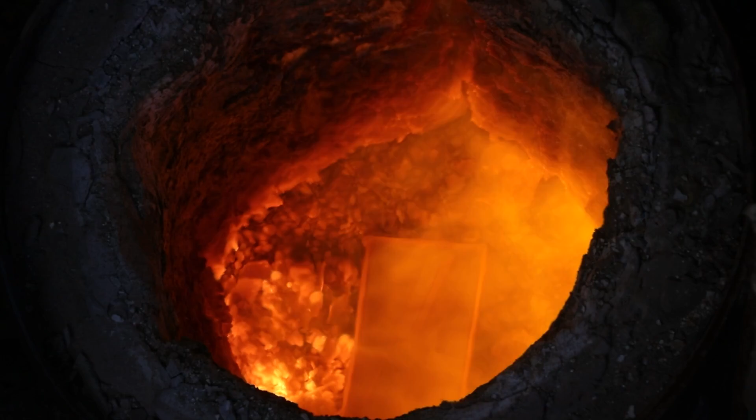For a topic that pretty much boils down to heat metal up to red and then cool it down quickly, it can be a lot more complex once you dive into the theory behind it, and I think there is a fair amount of misunderstanding on the topic. And you know, I can understand that.

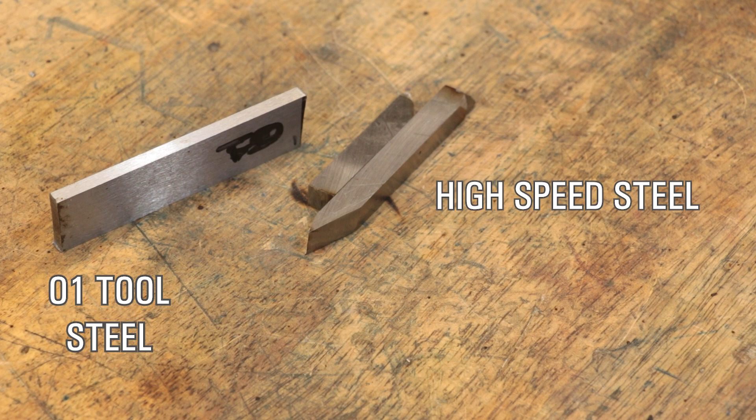For instance, let's take these two pieces of steel. They're both tool steel and they look almost identical, but if you were to heat them up and quench them in oil, one of them would be relatively unchanged, whilst the other one would be in the 60s Rockwell C hardness, which is very hard for a metal.

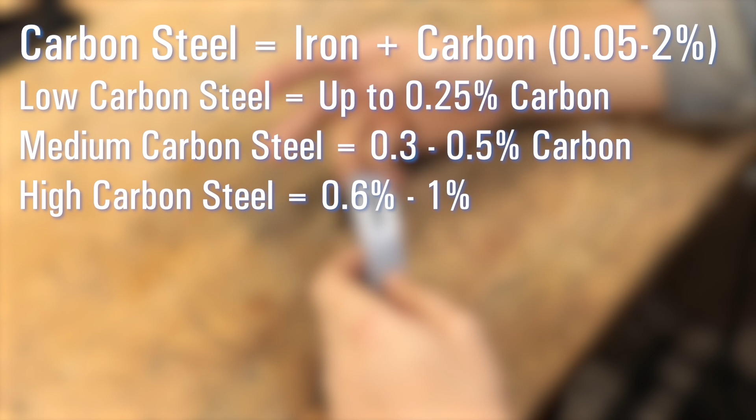But before we talk about alloy and tool steel, I want to go over plain carbon steel first. It's the most basic type of steel to heat treat, and it's probably the most straightforward to understand. And by carbon steel, we're talking about steel where the composition is iron and carbon for the most part. And as a percentage, carbon is going to make up about 0.05 to 2% of the metal.

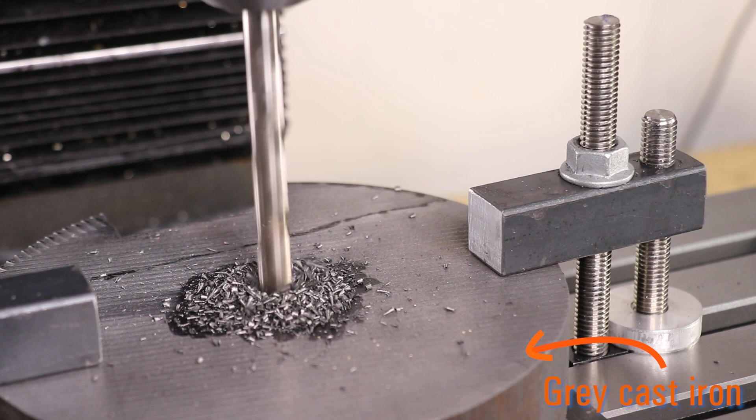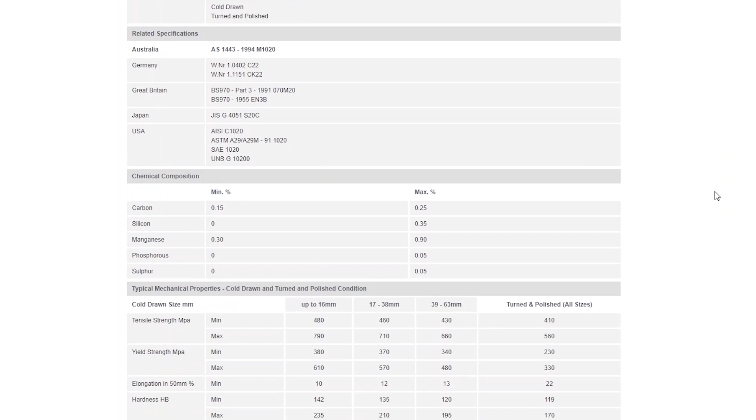Once you go above that, you start to get cast iron, and that is a very different metal in terms of its physical properties and heat treating. Now generally you will get some phosphorus or silicon or sulfur mixed in, but we won't worry about that a whole lot here. What we're really focusing on is the carbon,

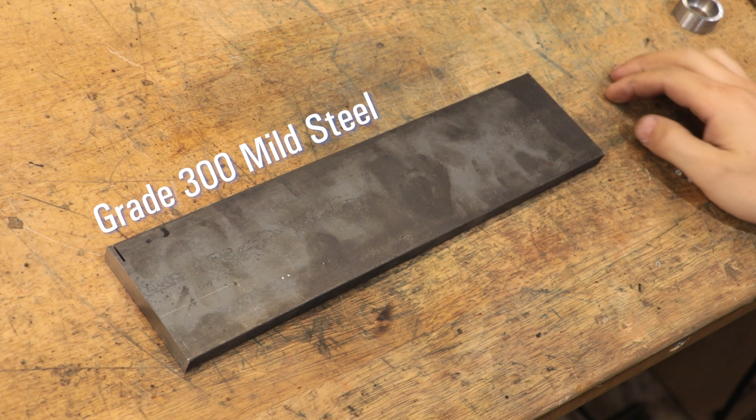because when it comes to steel, and this includes alloy steel, the amount of carbon really does make the difference when it comes to determining the physical properties. That being how much carbon there actually is and how it's arranged in the internal microstructure of the steel. Case in point, this is mild or low carbon steel, and you see me use this stuff all the time. This stuff has about 0.2% carbon,

and it's a really good steel to work with, and it's a relatively strong metal. But if we took this same piece of steel and raised the carbon content so it was closer to about 1%, it might be twice as strong, and that's nothing to do with heat treating, that is just the effect of what a small amount of carbon can do to steel.

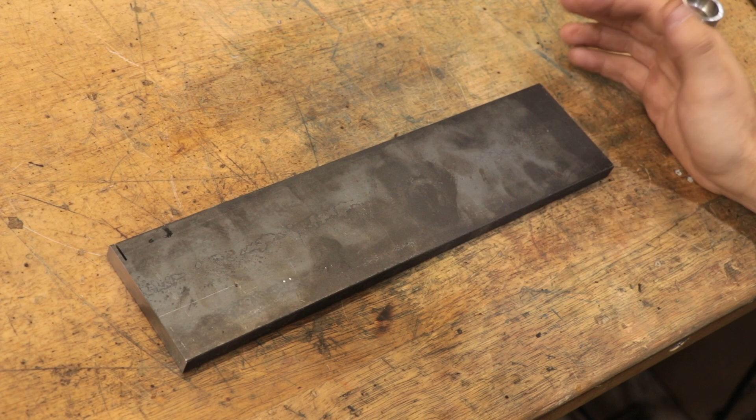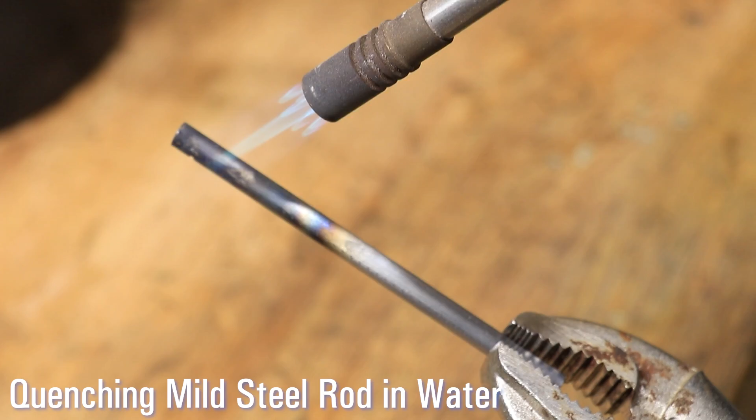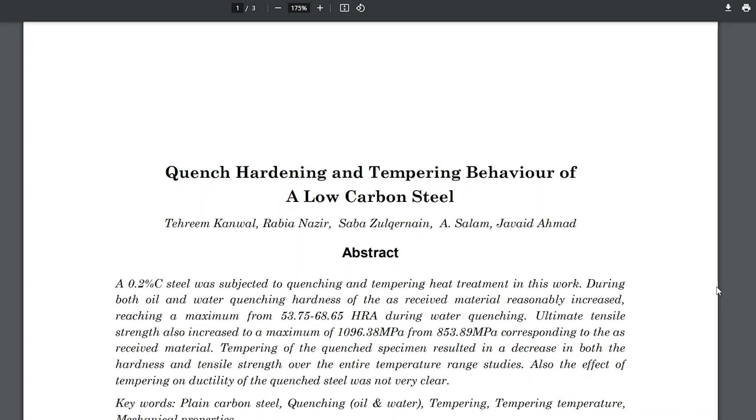Speaking of heat treating though, low carbon steel, well, stuff lower than about 0.3%-ish, won't readily respond to quench hardening. I mean, you can try it, but not much is going to happen, or at least not enough to make a knife. You can definitely affect some of the properties by quenching it, but you're not going to be making a knife from it.

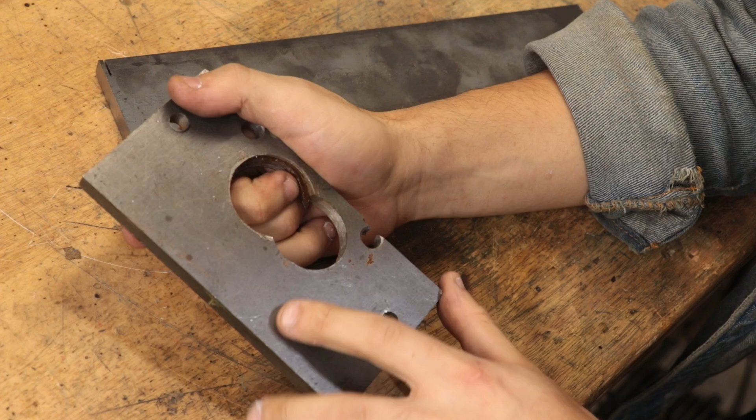However, there are reasons why you would want to heat treat mild steel. For instance, this is a piece of cold rolled plate which I use all the time. It's also mild steel, but it's also going to be a lot stronger and harder than a piece of steel that's been hot rolled. You can generally tell a piece that's been hot rolled or cold rolled because hot rolled steel will have that flaky mill scale.

Now the reason why cold rolled is going to be harder and stronger has nothing to do with the carbon, but it's all down to the cold forming process. When it's actually rolled in the steel mill, it's been crushed at a low temperature, and as a result, the internal microstructure has been crushed and deformed.

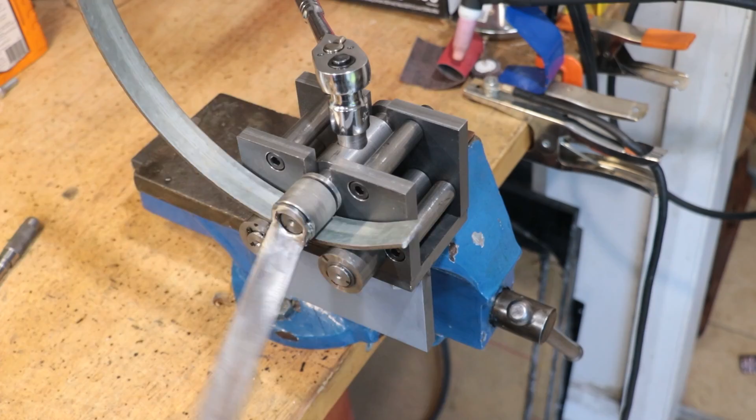If you've ever bent a piece of metal, you know that it tends to get harder to bend the further you bend it. And that's pretty much the same thing here. You're bending and distorting the microstructure, and the more you bend it, the harder it becomes.

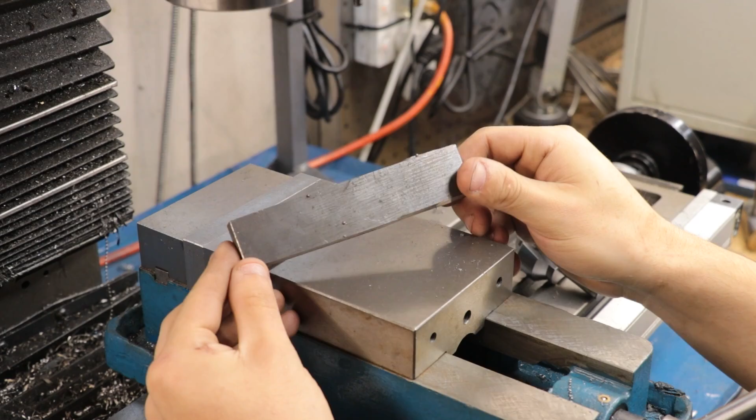The big problem with this though is that it leaves the steel with a lot of built-in stresses which can cause the part to warp if you heat it up or weld it or machine it. And unfortunately, the warping might not be present until you take it out of the vise or the chuck.

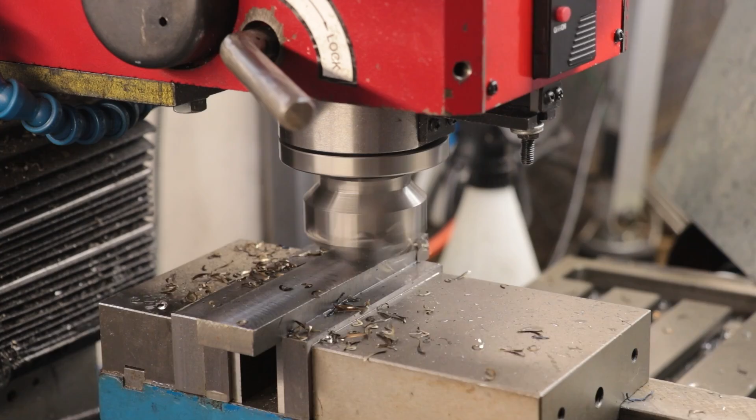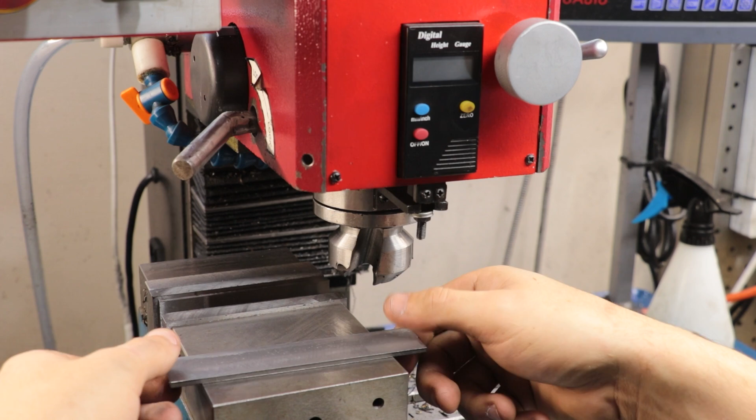As an example, I'm going to be machining down a piece of cold rolled plate, and I'm going to be taking all of the material away from one side only. And in doing so, that should leave the internal stresses sort of unbalanced, so to speak. Now I know that the mill should be adequately trammed, so the piece should be perfectly flat whilst it's still in the vise, but once I take it out of the vise, you can see that it's no longer flat. The stress in the steel has warped it.

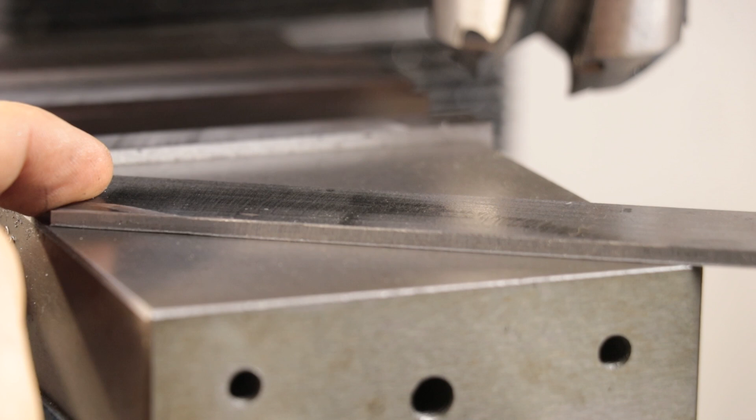Now, as you can see here, it's not a whole lot. I could only fit, say, a 10 micron shim underneath it, but at the end of the day, that's still 10 microns too much, and depending on the tolerances of the part and the drawing, that could easily account to a scrapped part. Now, if we further heat or unevenly heat it, we can cause it to warp even further. It probably doesn't look like a whole lot more on camera, but I can now fit a 15 micron shim underneath it.

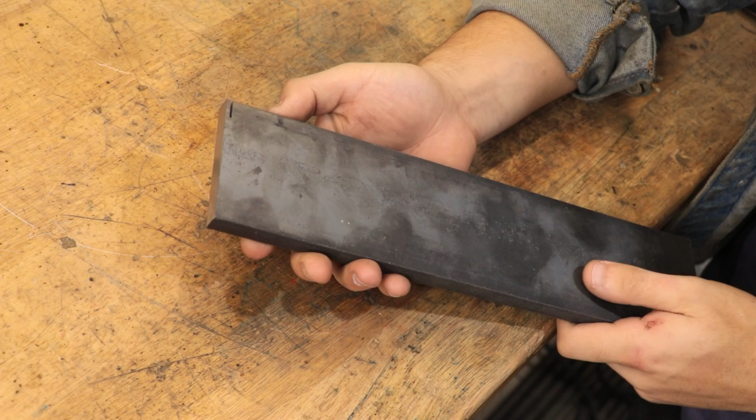Now, generally speaking, this shouldn't happen on steel that's been hot rolled, since the forming process takes place when the steel is red hot, that's above the recrystallization temperature, and as it slowly cools, it should leave it with a relatively stress-free, normalized microstructure. However, hot rolled steel isn't dimensionally accurate because it tends to shrink as it cools, so

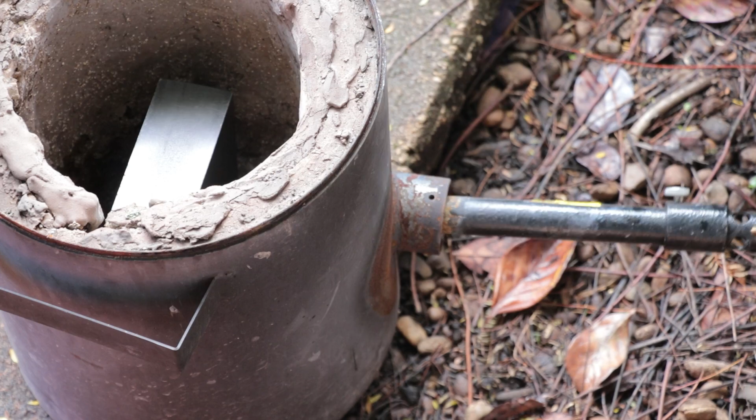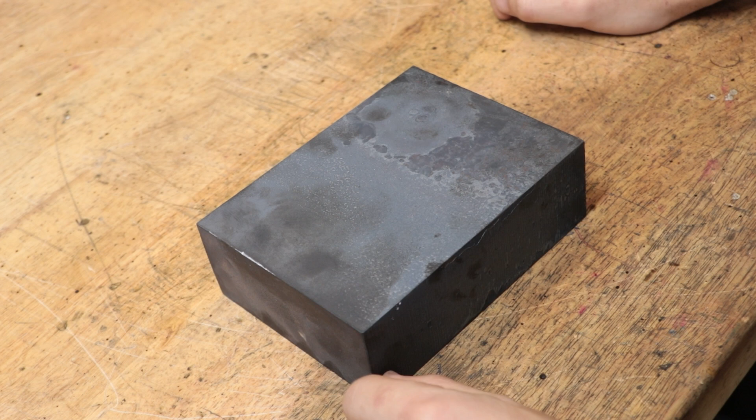what a lot of people do is they'll take their cold rolled steel, which is dimensionally accurate, and then they'll put it in the furnace at about 500 to 600 degrees for a few hours, and that should relieve the stress. Doing that is effectively a reset button for the microstructure, and the resulting material shouldn't be stressed. You can also buy steel that's already been normalized in a furnace, although you are going to pay extra for that. Anyway, let's get back to the project at hand, and that's going to be to make a knife.

I suppose if I'm going to be making a knife, I might as well make something that is different to one that I already own. So what I'm going to make here is a Japanese style single beveled knife. I've always wanted one, so I think this is the perfect project to get one, although the big downside to them is they can be a lot more difficult to use and sharpen.

Now, when most knife makers start off these projects, they'll generally start with a blank of 1055 or 1080 or 1095, effectively high carbon steel. However, for this project, I'm starting off with the cheapest, crappiest steel that I could find. This is a piece of 25x6 mild steel flat bar from Bunnings, and it is low carbon and it is not suited for knives. I think knife makers would call it low quality steel, and it might be, but with a small amount of metallurgy, we can very easily make a perfectly usable knife out of it.

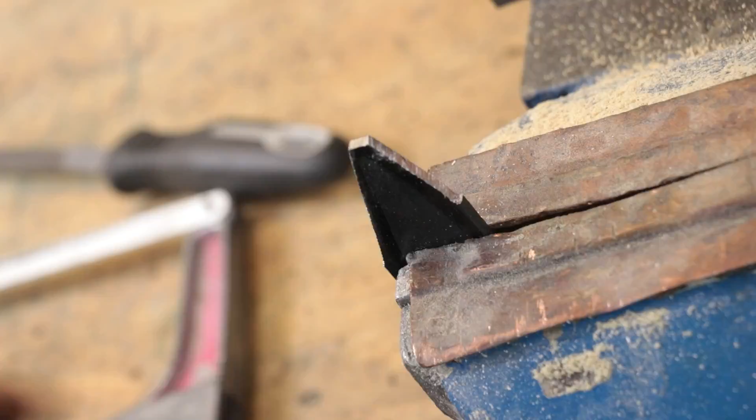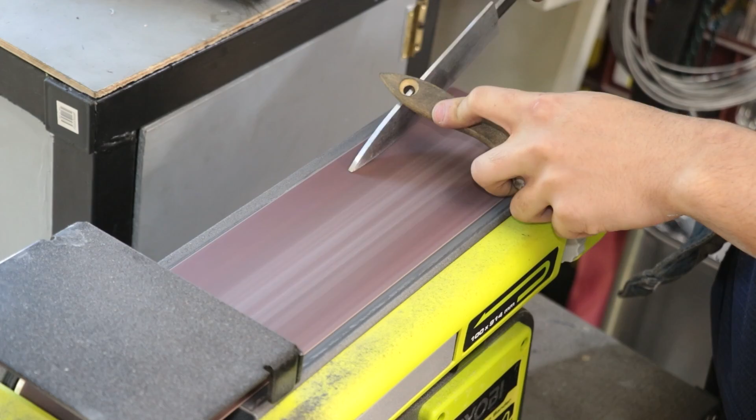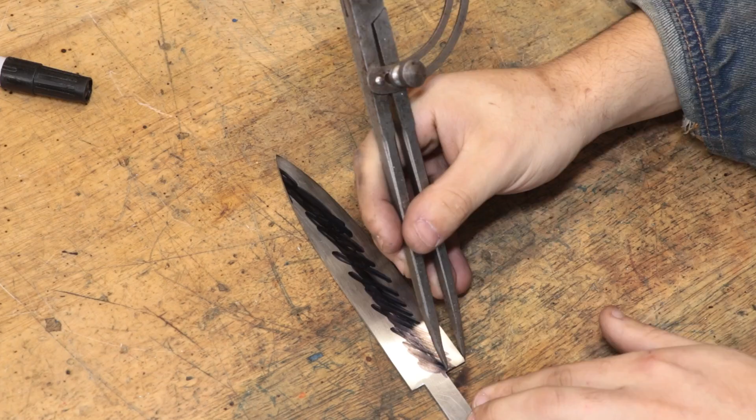Anyway, the belt grinder, I'm going to do my best to grind the blank down to the shape that I'm going for. I'll then add a scribed line as my guide, and I'll slowly work my way up to the scribed line to form the bevel. It's also worth pointing out that since I'm right-handed, the bevel on this type of knife will go on the right side. From what I understand, if I was a lefty, that would be the opposite.

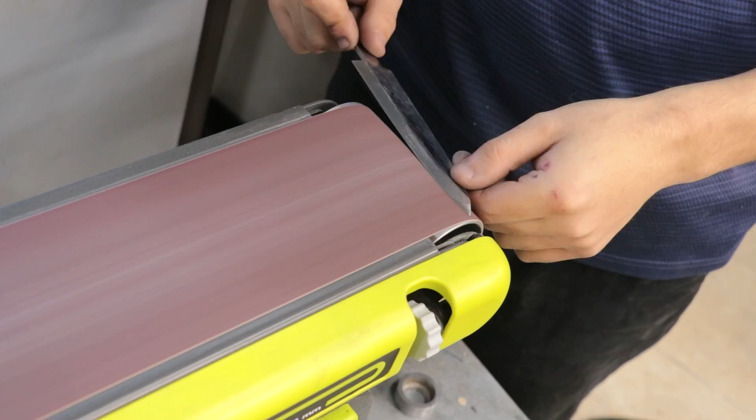The single beveled knives also tend to have a hollow grind on the backside, and I gave it a shot at adding it, but the results were kind of mixed. I can now take it over to the workbench and try to get some of those deep scratches out of it. Alright, it looks pretty good so far.

With the knife blade now roughly done, we now need to get started on our first heat treatment stage, and that's going to be to get more carbon into the steel. Like I said before, this is mild steel, so there's not enough carbon to get it hard enough, so we need to add more carbon into the steel. There's quite a few methods which we can do to achieve this, but I think the most basic in a home workshop is to pack carburize the part and case harden it.

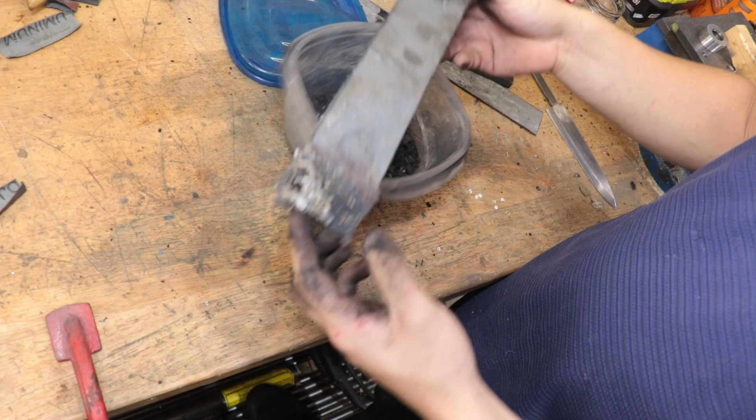I have a dedicated video on the subject, but in short, the piece of steel is going to be placed in a steel packing box. It's effectively a piece of tube with the bottom welded up. I'll place the knife into the box and then I'll pack it in with a mixture of crushed up charcoal and sodium carbonate. The charcoal is going to be our main source of carbon, although the sodium carbonate does help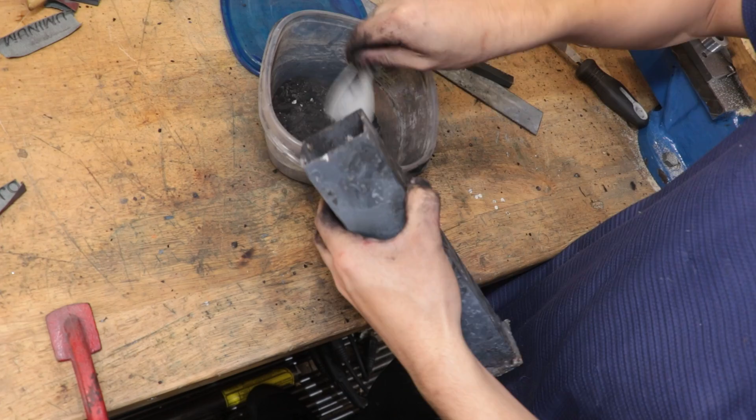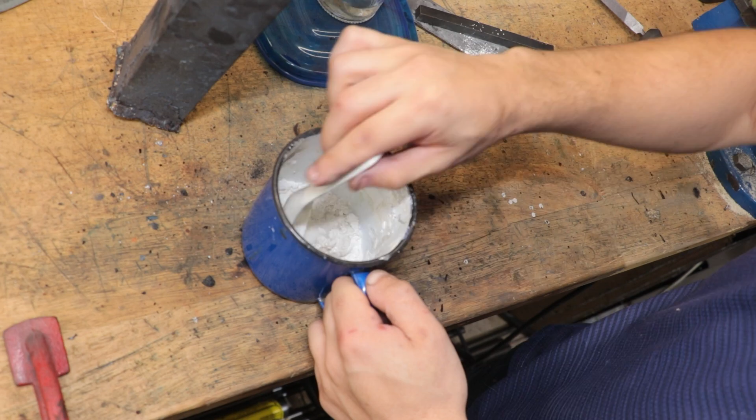in the early stages. Some people do add barium carbonate, and there are a few other things which you can add, but I think sodium carbonate is a good addition because it's very cheap and you can buy it as washing powder. I can then seal the top off with a heat-proof plaster or cement, and then I can get it in the furnace.

Now this process will take about 30 minutes to start working, since the heat needs to travel all the way through and heat the steel to 720 degrees Celsius. At that point, it can start to absorb carbon.

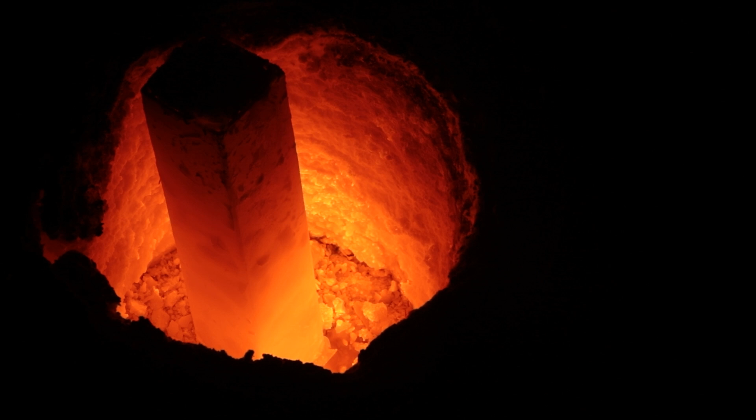And it's going to be getting that carbon from the charcoal and the sodium carbonate, but it's not directly diffusing it. What's actually happening is, at these high temperatures with little oxygen, they both start to break down to produce carbon monoxide gas. The carbon atom will then split off and diffuse into the steel, and the spare oxygen will bind to create carbon dioxide.

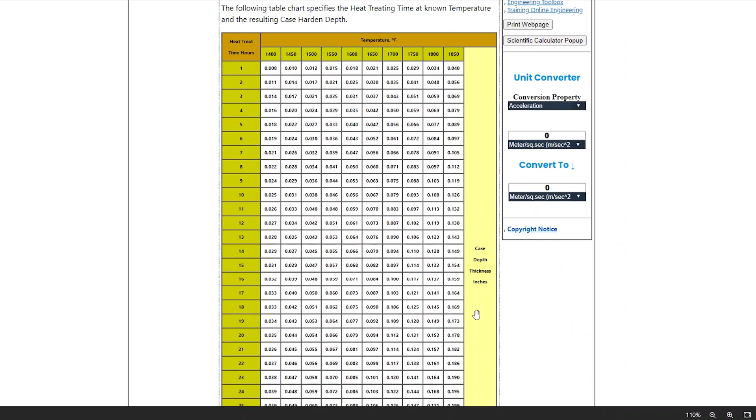Now the carbon builds up on the outside of the steel and it works its way into the centre at a rate of about 0.01 to 0.02 millimeters per hour. It's a very slow process, and I've seen videos where people will spend days maintaining furnaces to get the carbon to diffuse deeply into a piece of steel.

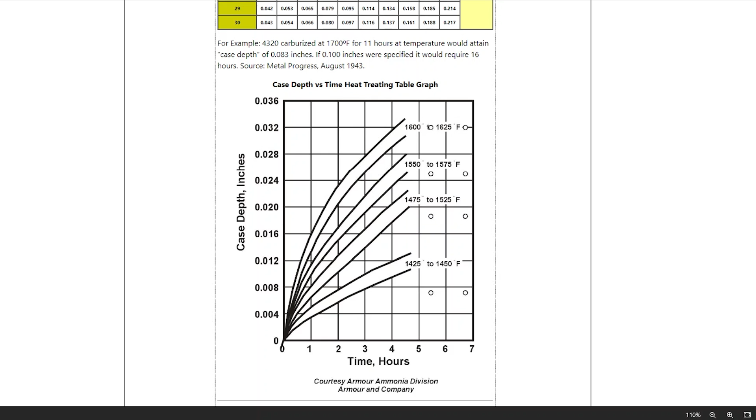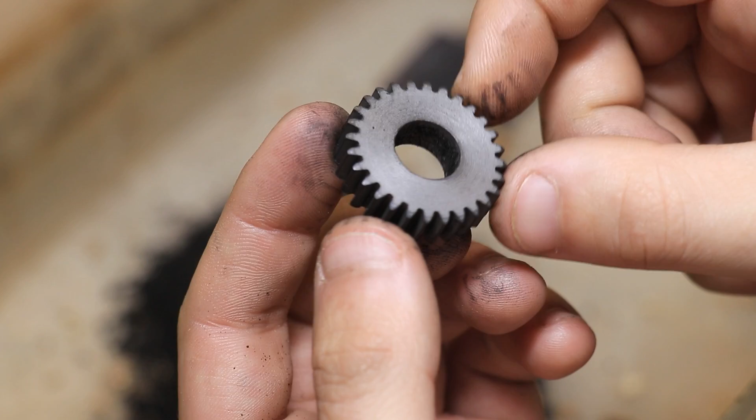And effectively what we're doing here is encasing the part in a high carbon steel case, hence why this is known as case hardening. Now this can be really beneficial for some parts because you're able to retain the tough low carbon steel core, but also increase the hardness of the outside, and that's why this can be used to make gears. The outside, once you quench it, will have increased wear resistance, but the tough core should resist any shattering or fracturing.

It's also worth noting that if we started to fold the steel, we could start to distribute the carbon throughout the steel more evenly. Obviously, it's not the only reason why you would fold steel, but it is definitely one of them. Now after a few hours of hardening, I'm going to leave it in the furnace to cool overnight.

Now the fact that I've left it in the furnace to cool overnight means that the steel has been allowed to anneal, and that will have left the new high carbon steel layer in its softer state with minimal internal stress. Now the exact reasons for this are not hugely important when it comes to home heat treatment, but in short, the slow cooling has allowed the carbon atoms to bind with some of the iron atoms to form iron carbide or cementite.

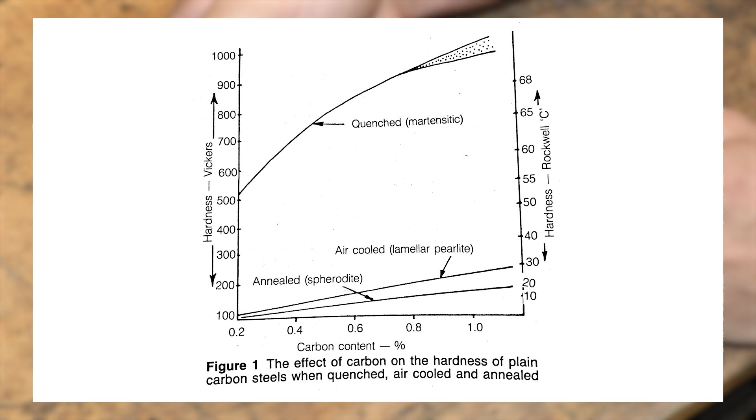And this is only true for a fraction of the steel because most of it is still left as pure iron. Now the small amount of iron carbide or cementite has a hardness of 72 Rockwell C hardness, whilst the ferrite or pure iron has a hardness closer to 0. The resulting hardness is going to be anywhere from 0 to 20 Rockwell C hardness, and it's going to be dependent on the amount of carbon. More carbon results in more iron carbide forming, and as a result, the overall hardness will increase.

Now that obviously is a bit of an oversimplification, but the important thing is we now have a case of high carbon steel which we can now harden. And we need it to be in the 50s or 60s Rockwell C hardness to use it effectively as a knife. So what we need to do is heat it back up to red and then cool it down to reharden it. We need to get it up to red so we can start to reshape and reform the internal crystal lattice.

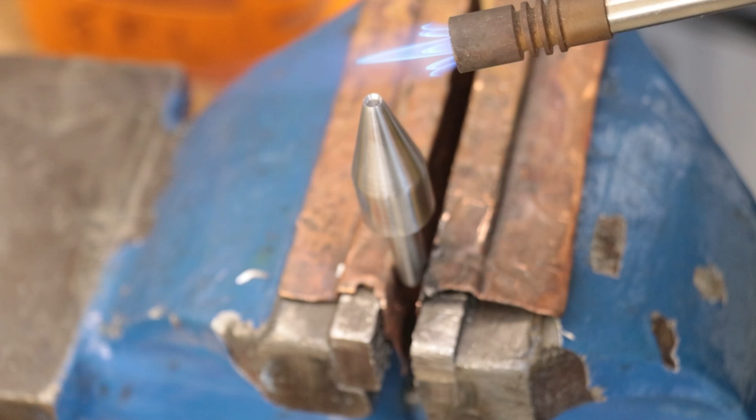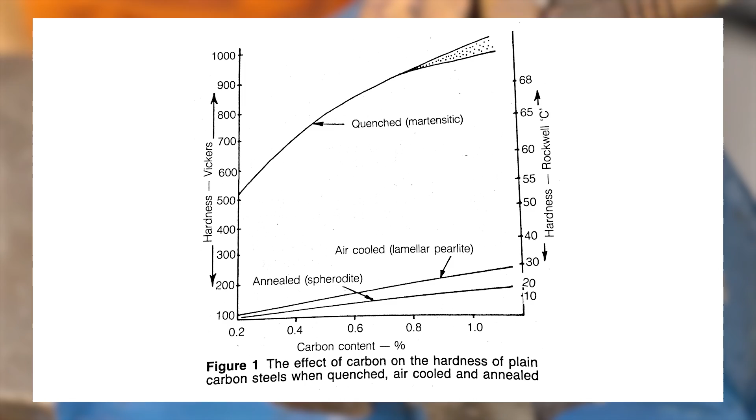Now it's worth pointing out that the overall carbon content is going to determine the maximum hardness that we can get, although it is not perfectly linear. 1045 won't get as hard as say 1095, however the difference is not that big. I've gotten close to 60 Rockwell C hardness with 1045, whereas 1095 only pushes about 68 Rockwell C hardness. With that said though, I generally don't ever know the final carbon content of the case harden, but I can very easily get 65 Rockwell C hardness.

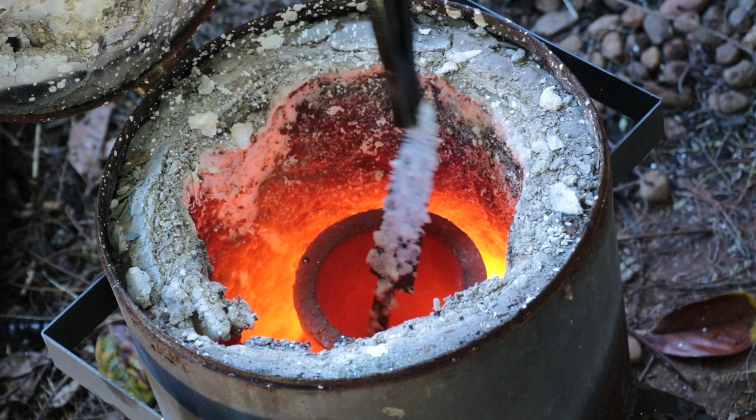So I'll coat the knife in a flux, and that should protect it from oxidizing at high temperatures inside the furnace, and then I'll get it in the furnace and get it red hot. Like I said before, we're effectively resetting the internal microstructure of the steel, so how we go about cooling it will determine the microstructure and the hardness.

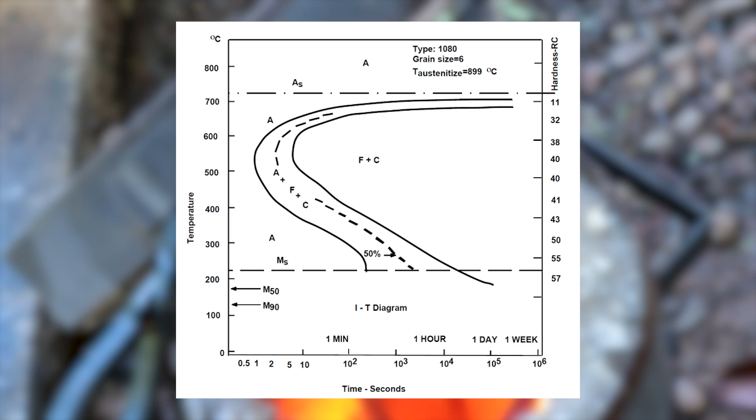Okay, once again, it's not that simple, especially if you go off the TTT diagram, which dictates the grain structure that can be achieved through time and temperature, but for a home workshop setup, we can effectively ignore that for the moment. The real question is, well, what do we quench it in? Do we quench it in water or oil?

And I've had people comment that water quenching is somehow bad for steel, and for the most part, I understand the sentiment, but I disagree. Water, and by extension a 10% salt brine solution, is going to offer you the fastest quench for steel, and it's going to give you the maximum hardness, at least for plain carbon steel. And for me, it is my preferred method for quenching parts, not because it gives you the best results, but mostly because it is the easiest method to set up and then dispose of.

You know, for some of the parts that I'm doing, I need easily 20 litres of water, and it is a lot easier to set up 20 litres of water in a tub than it is to set up and then clean up and dispose of 20 litres of oil. The big downside to water though is that because the part cools down so quickly, there is a big risk of the part cracking as the part cools down, contracts and becomes more brittle. And especially once parts become complex with thin walls and internal cavities, then you can have a lot of issues.

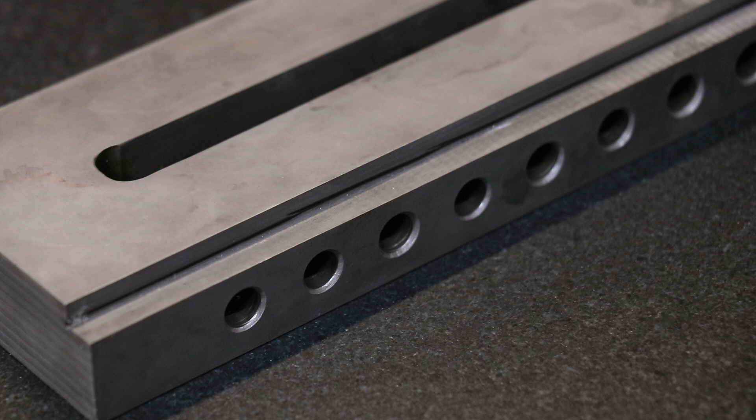As the part cools down, you also want it to cool down evenly, and if it's unevenly cooled, it can cause it to warp. And when you quench in water, there is a huge risk that if the part doesn't cool down evenly, the part is going to warp and distort. And if that already wasn't bad enough, the water will then turn to steam and it will coat and stick to the part and further cause it to cool down unevenly. Now, a 10% saltwater brine can help reduce this, but there's only so much that salt water can do, and you end up using a fair amount of salt to achieve it.

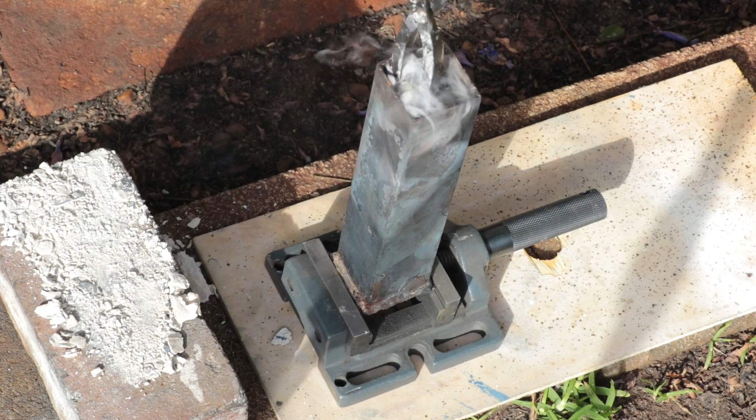On the other hand though, oil cools at about 1/3 the rate of water, so the risk of distortion and cracking is far less. But generally with carbon steel, it will tend to result in a part that isn't as hard, although it seems to be very dependent on the mass of the part that I'm quenching. Smaller parts tend to come out closer to 60-65 Rockwell C hardness, which is very close to water, but as the part gets bigger, it tends to drop into the 50s. I've also played around with using hot oil or small volumes of oil to reduce the rate of cooling to help reduce the potential for warping, and that seems to work well, but it does leave the hardness in the high 40s to low 50s Rockwell C hardness.

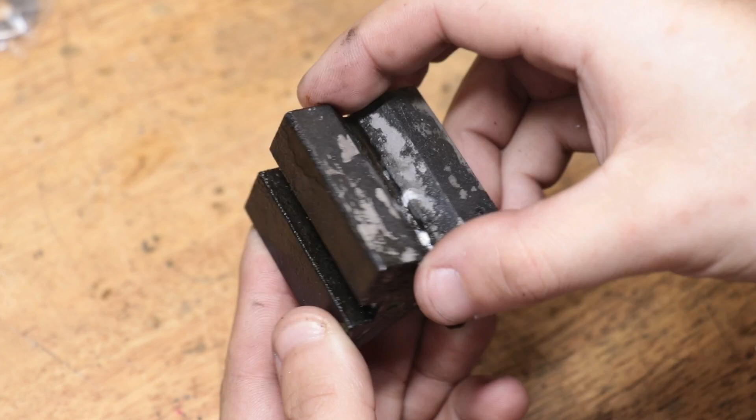Now, there are special quenching oils with specified cooling rates that they do sell, but for home shop use, I've always used vegetable oil and they work just fine. Most oils tend to cool at a very similar rate, and for home workshop use, you really aren't going to notice the difference. The only big downside to using oil is the cleanup and the residue that's left on the part. It's polymerized oil, which is very similar to seasoning a carbon steel wok, but it can be a nightmare to remove. Sodium hydroxide tends to help break it down, and then steel wool then helps remove the rest.

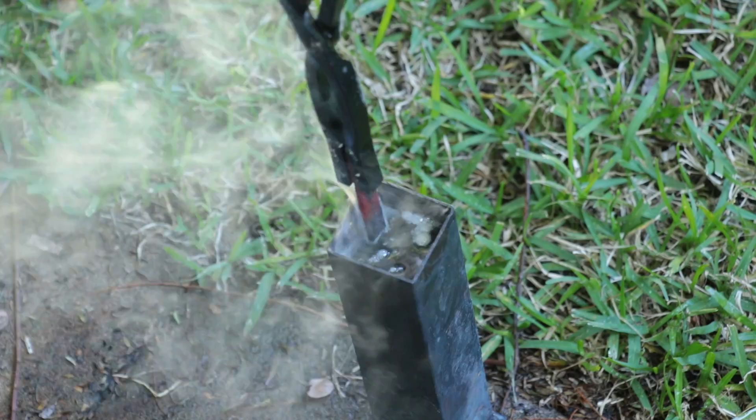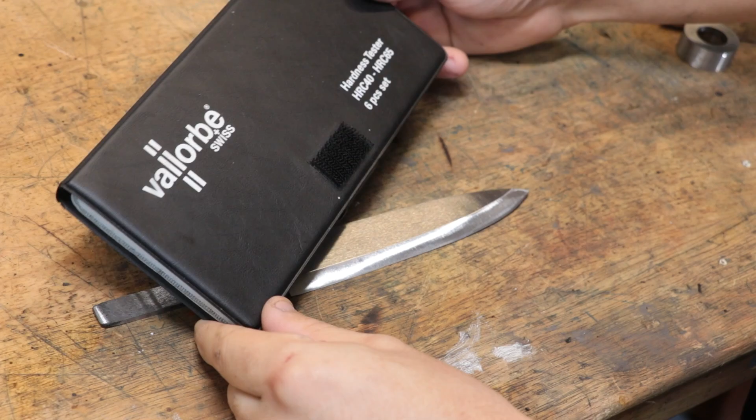Now the final hardness we're left with is just shy of 65 Rockwell C hardness. There's quite a few hardness testing tools which you can buy, and they can get you a very accurate reading on how hard something is, but I think for a home workshop, using these hardness testing files should be good enough. As per the files, the 60 Rockwell C hardness file doesn't bite, but the 65 is only just starting to, so the hardness is just below 65 Rockwell C.

Now the reason why quenching is able to make it so hard is all down to that rapid cooling. The carbon is not able to diffuse out and form cementite, but it instead forms something called martensite, and that makes the steel incredibly hard. However, we can't leave it like this because rapid cooling has left the steel incredibly stressed and brittle. It's effectively lost all of its toughness and it's very easy to shatter. Although it's worth pointing out that heat treating steel won't change its flexibility, that always stays the same.

Now the next step is to reduce that brittleness and get some of that toughness back, and that's going to be in the temper step. Sometimes I do skip tempering with case hardened parts, but since the blade has probably hardened all the way through, I am going to have to temper it. In fact, just to show you how bad it was, I tried to sharpen it on a whetstone and the edge kept chipping.

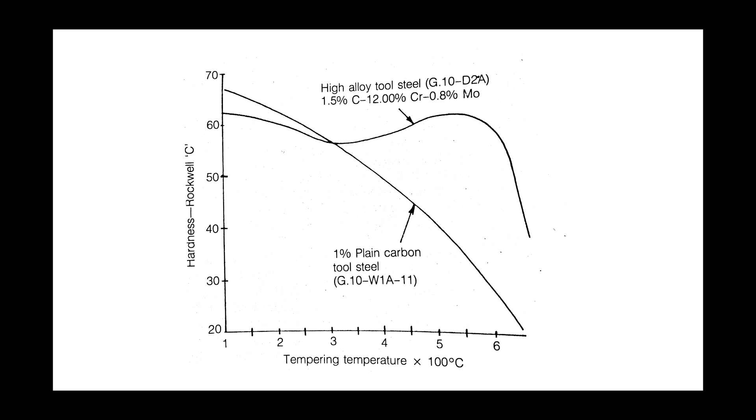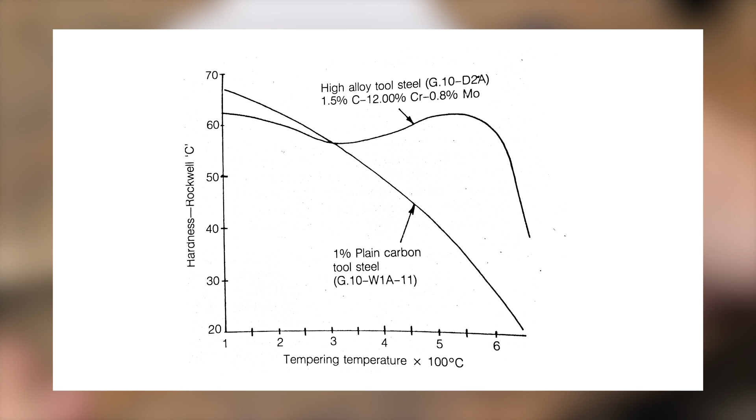Now thankfully, tempering carbon steel is a pretty straightforward process. You heat it to a desired temperature and you soak it there, and the hardness will drop, but the toughness will increase. Now the hardness that you get when tempering is pretty much proportional to the temperature that you temper at, although it's not linear, and there are graphs for each type of steel and the final hardness that you will get. Now some people heat the steel with a blowtorch and use the oxide colour as a sort of guide for the steel's temperature. The oxide colour changes depending on the steel's temperature, but I prefer to simply pop it in the oven and leave it for an hour.

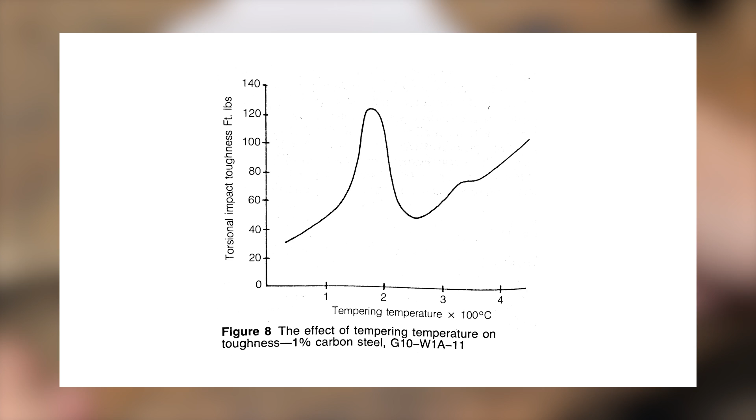The amount of toughness that you get from steel, however, is going to be all over the place, and it's going to change based on the alloy. As you can see in the graph, it drops and rises several times, and you'll want to make sure that the temperature which you temper at is pretty much spot on. For example, with W1 steel, the difference between 180 degrees and 200 degrees for the temperature can represent a huge change and drop in toughness, so make sure that your oven is accurate. Thankfully though, once it has been tempered through, it is much more receptive to being sharpened without shattering.

Unfortunately, it does look like the blade has warped a little bit during heat treatment. Now, if the core was unhardened and still quite ductile, I could probably bend it back into shape, but I don't want to risk the blade cracking. It's probably hardened all the way through, and if I tried to bend it too far, it would probably crack on me. It has been tempered, but it is still quite hard, so I don't want to risk it. In theory, if I really wanted to, I could heat it up and anneal it so it becomes fully ductile, but then I'd have to repeat all the steps again, and you know what, I'd probably end up warping it again anyway.

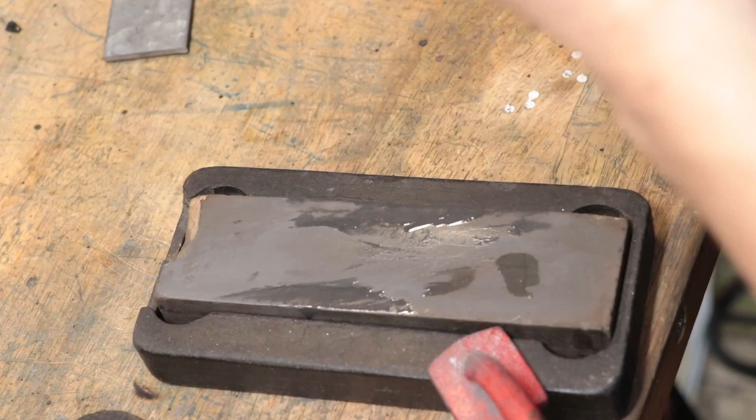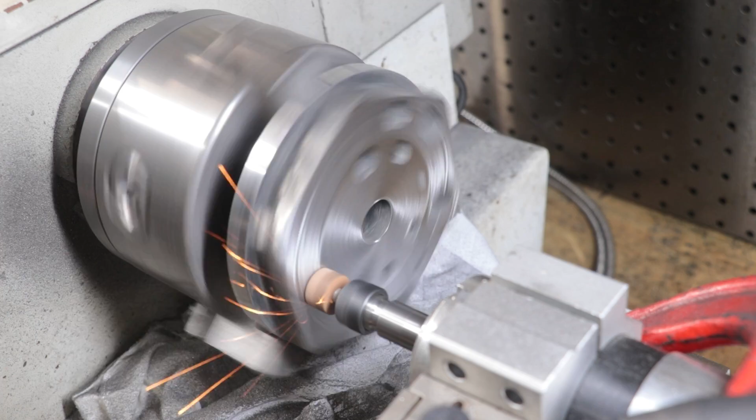Now I didn't mention it before, but heat treating is really a last resort for me, and I only do it if I absolutely need the part to be incredibly hard, and that's because of the risk of the part warping or cracking. Cracked parts are especially annoying because that is pretty much game over and I have to restart from the very beginning. Warped parts aren't as bad, but they will need to be ground to spec again, and that's why it's always worth making parts that need to be heat treated a little bit larger than they need to be, because anytime you have to grind it back, that is more material that needs to be removed. And unfortunately, since I don't have a proper surface grinder or grinding setup, grinding parts back into spec can be very difficult.

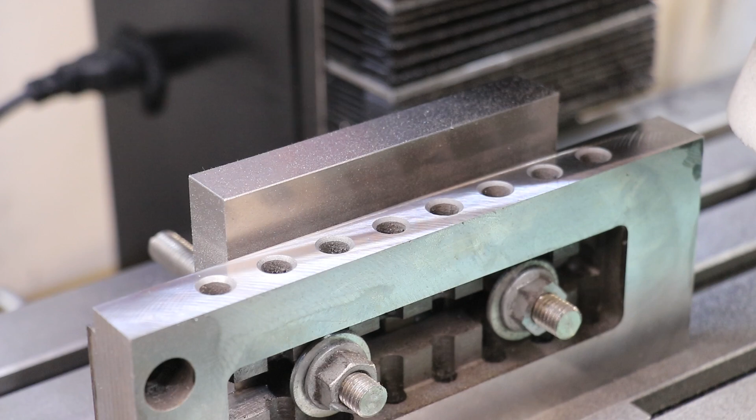Now in theory, carbide can cut hardened steel, but it does a very poor job and is generally never flat enough to be a good result. There are other materials that can cut hardened steel, but they are either too expensive or they won't last long enough for me to use.